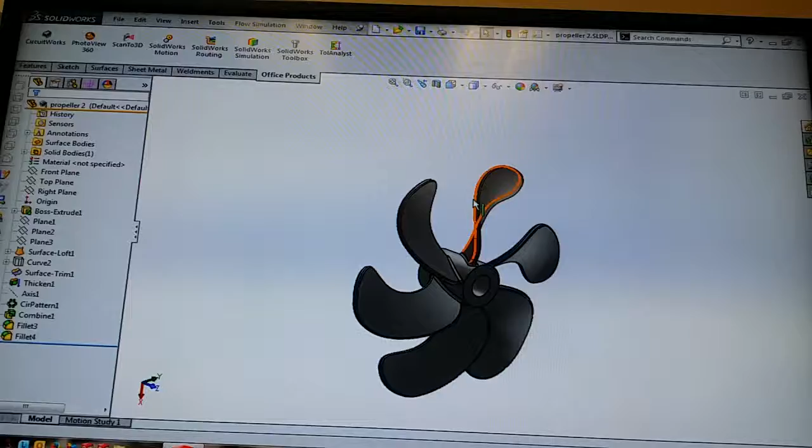Yeah, so I did that. I guess I didn't quite understand, so when I ran the simulation it didn't look right at all.

Okay, I'm just gonna mock this up. Again, the whole purpose of this is for stability. So you mock up a hollow cylinder, on the inside face of the cylinder apply an environmental pressure condition, and the whole purpose is to help stabilize it. I'll just draw something similar here.

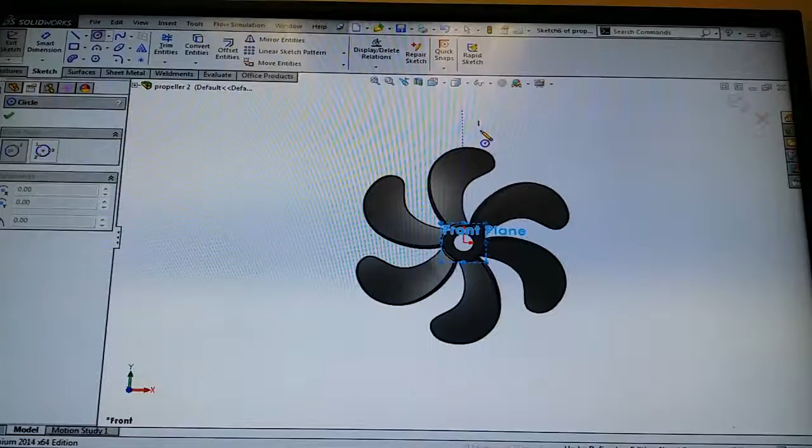So you're just doing a circle? Yeah, you're just sketching on the front plane. Okay, keep it easy there.

Work with... you got close to the boundary. Do you want to go pretty far out, or when you're setting up that circle, you don't want it too close to the object, or it'll kill the mesh.

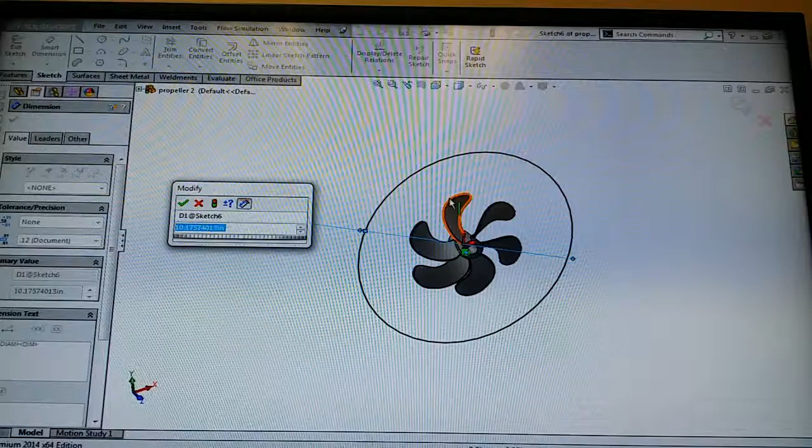You have to get the mesh cell size quite a bit smaller. You want about, I'm going off memory here, about 5-6 cells at least from the outer leading edge of the blade out to the boundary of the cylinder.

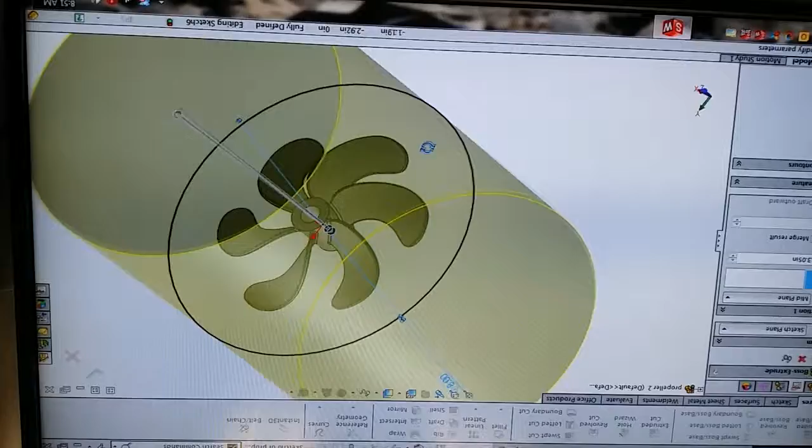Okay, so I'll probably scale this down a bit. Just look at it, that'll probably work. Okay, just want to do this, I just come this way, right? Coming in, yeah, so you really just want it.

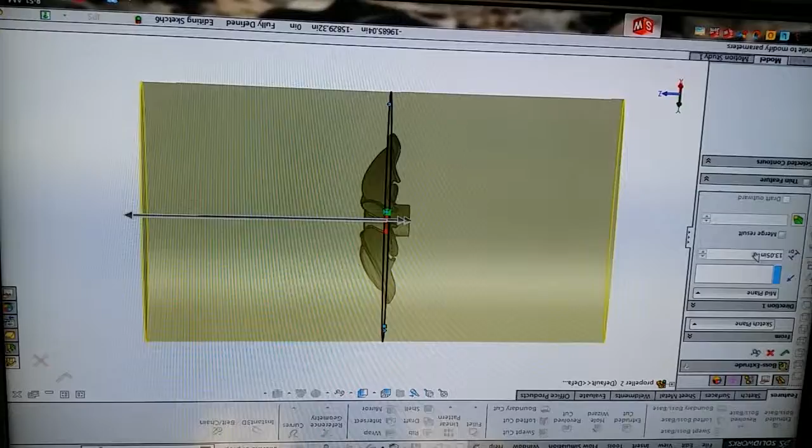Are you doing both directions? Yeah, it was at midpoint. Pretty much want it far enough distance in front of it so the flow can develop and pass, and you don't want to obstruct it. A lot of times you're kind of guesstimating size, running it, taking a look at the trajectories, and going from there. But I'm just gonna try 14 inches.

Okay, cool, that should be good right there. I'll show it.

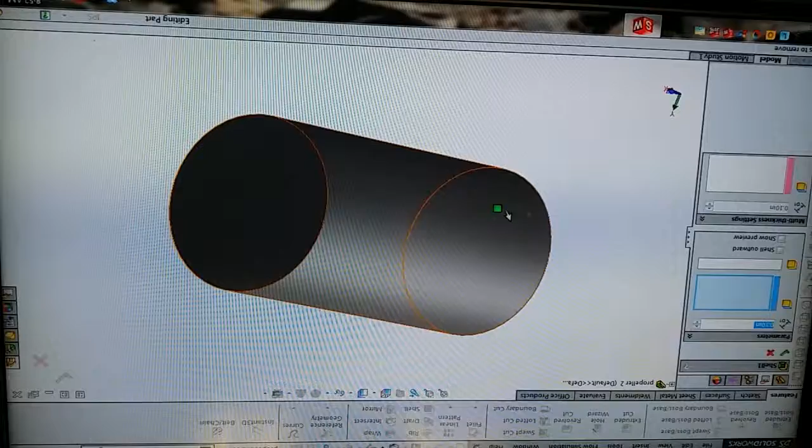Oh, you're shelling it. Yeah, so I uncheck merge result, and then I still have two separate bodies there. I want to make sure to shell the cylinder, doesn't matter if it takes too much.

Where's the shell feature? Oh okay, I'm trying to go with default, 0.10 inches is fine.

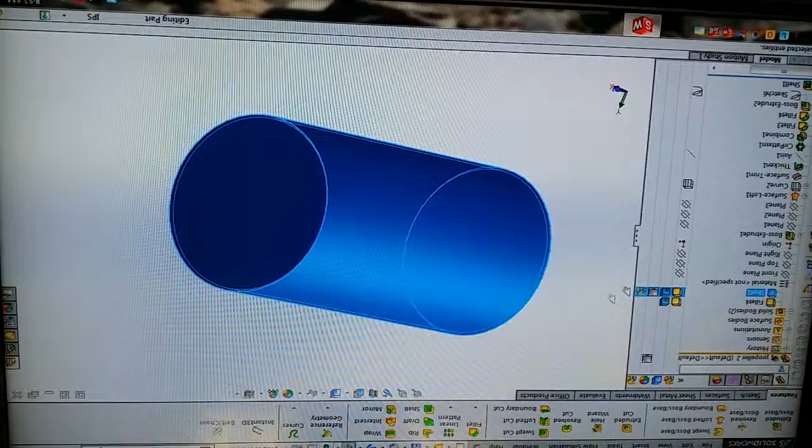Let's make this transparent. Yeah, now so I was trying to model up a tube, just a straight tube, to run a flow through, and it said the ends needed to be capped.

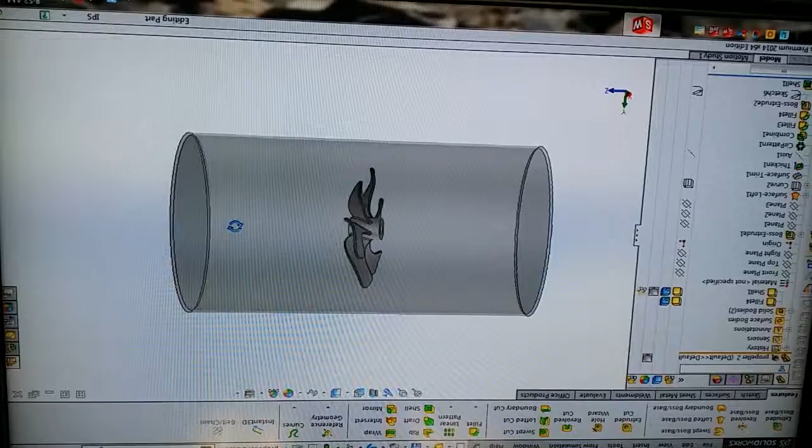How come? Well, it needs to be able to define the fluid domain, so it has to understand what is the volume of the flow. Oh I see, okay. In this case with the shell, it doesn't have to be separate bodies, so I can just pick the inside face of the shell for my boundary condition surfaces.

So how did you just do that? To the section, you just kind of show it. Oh okay, and it made the body transparent just to be able to see through it.

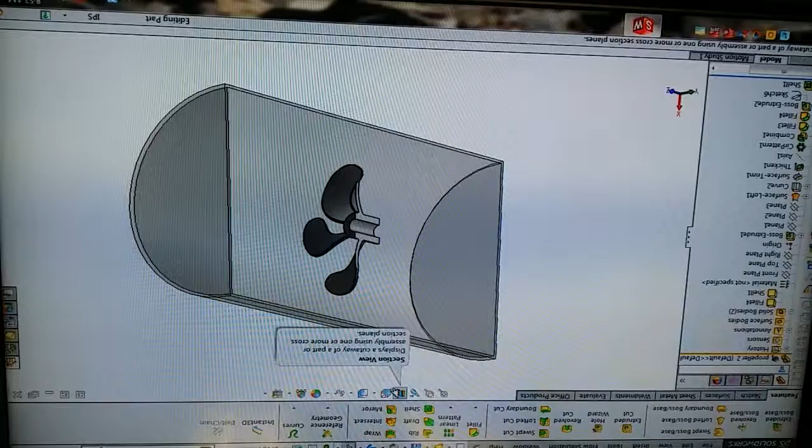You just picked the right plane for that? Yeah, doesn't really matter, either right or not. Actually top or right doesn't really matter, just a section cutting through it to show.

So my propeller disappeared. You have merge result on, most likely. Where's that? Go and edit your Boss-Extrude2. Edit feature? Yep, yeah, uncheck the box merge result.

Okay cool, and then you'll be able to- that was two bodies. I thought I shelled it, oh do I need to? Now it failed because there's multiple bodies.

Then it's okay, that's the next one. There we go, okay cool.

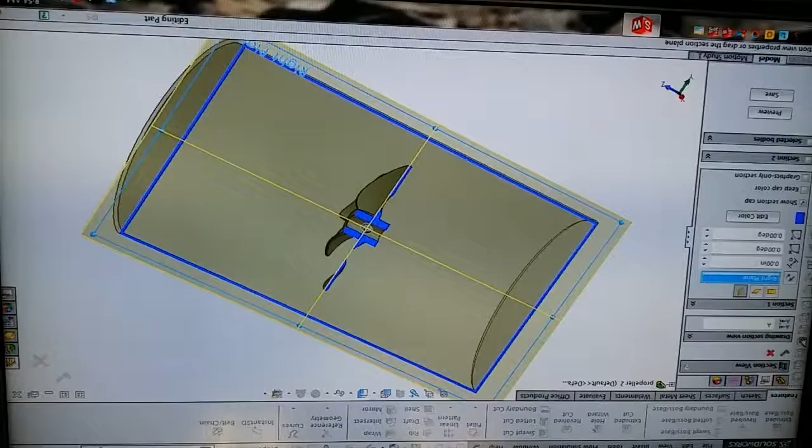And if you want to make it transparent, I'm not sure if you guys play around with the display pane at all, in the vicinity here. Yeah, with multiple bodies you can adjust the color, transparency settings, stuff like that, for just the outer body, so you can see through it.

Are you guys all SolidWorks users? You guys play with this? Pretty much, yeah, so the feature. Yeah, you guys been using the S key shortcut, setting the letter S? It pops a little toolbar. It's been out since 2010 or something like that. That's pretty cool.

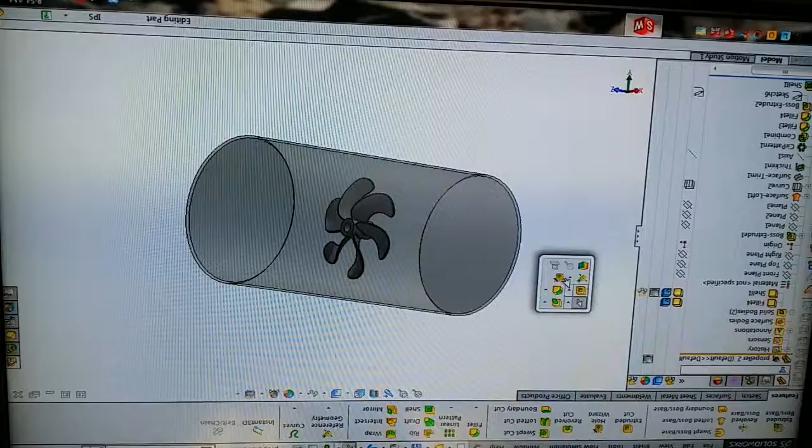Yeah, you can right click anywhere on the bar to customize, whatever you want there, put anything you want so you can throw features onto your sketch. The toolbar doesn't matter, so it's not mode specific.

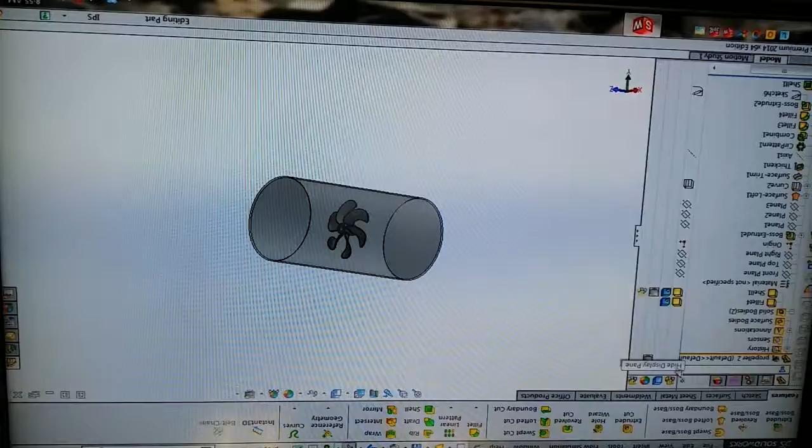Let's step to the wizard. In terms of creating a project, you use the wizard or hit new, and it'll be based off a template. There's only one template in there, but you can create your own. I'll just step to the wizard here - yeah, this is what I did.

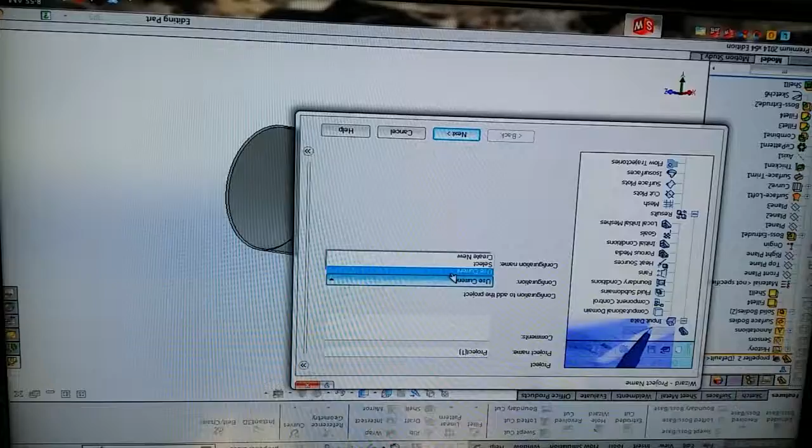For the wizard, depending on how you want to set things up, you can tell the system to use the current Solidworks configuration and create a new one, or use the selected configuration. I'm going to go with current here. For the project, I'll just leave it as the default name.

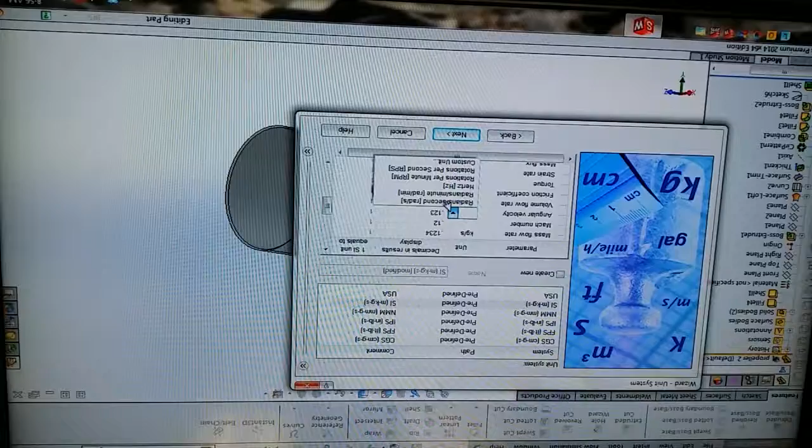In terms of rotational velocity, radians per second is the default there, but you can change it depending on what you're working with - RPMs, hertz. We'll probably do RPMs because you guys are calculating the propeller velocity in RPMs, right? Okay.

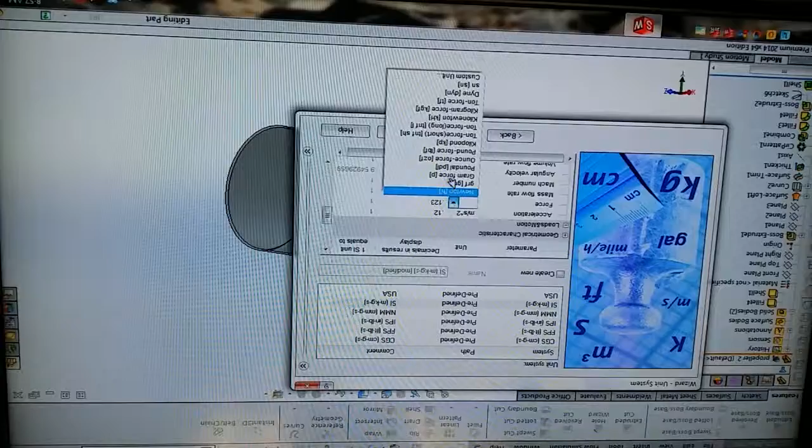Alright, cool. In terms of analysis type, in this case this would be internal since I created that cylinder, so we're just analyzing the flow inside the cylinder. If you have flow over the object or through the object, you'd go external, which gives you the ability to be in both domains.

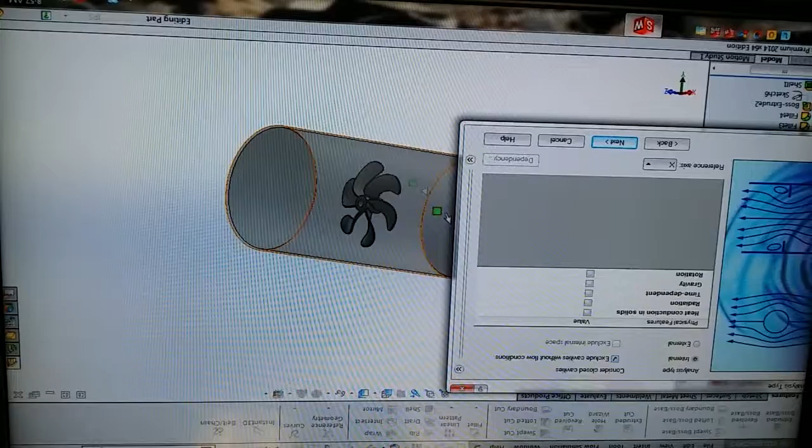In this case it's a real simple setup, not much to it. Exclude cavities without flow conditions - won't come into play, doesn't matter if it's on or off since there's only one cavity. The blade's not hollow, there's nothing in it, no internal domain, so it's just one entity and it doesn't matter if it's on or off.

If we were worried about actually taking a look at the blade heating up, we'd turn on heat conduction if needed.

In terms of actually running the calculation, there's time dependency or there's steady state. There's really no steady state solution for anything like this - it's just based on the stability of the flow, kind of oscillates. So we try to run it as time dependent, say run for a minute, 2 minutes, and kind of see what happens.

Or what you can do is set the end condition, say let's run it for 2,000 iterations or 1,000 iterations, and let it develop and stop yourself, take a look at what's working with the hard result. I'm just going to leave it off at the moment.

Gravity - again, it's going to be in water, so I don't know how gravity would apply. I wouldn't really think it would apply here, but you always worry about that.

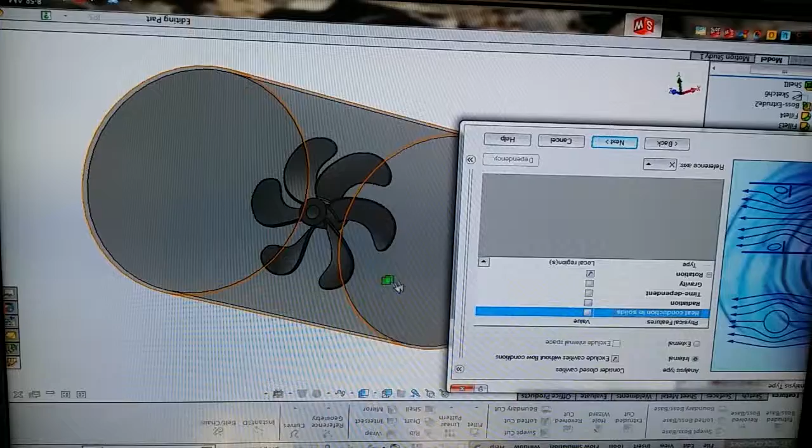In terms of the rotational region, the local region would be if I had to mock up a body of revolution around the entity, and say that's rotating at a certain RPM, which I'd pick afterwards. There's an option here for global rotating, which gives the ability to specify the entire domain is rotating - meaning the flow comes in and the entire entity is rotating.

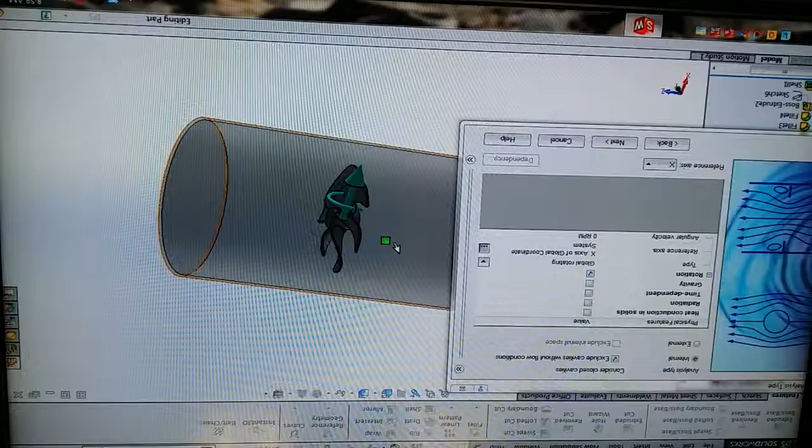I think the best bet on this one - let's play with this - should actually just go ahead and create a body of revolution around it first. Knock it up offhand.

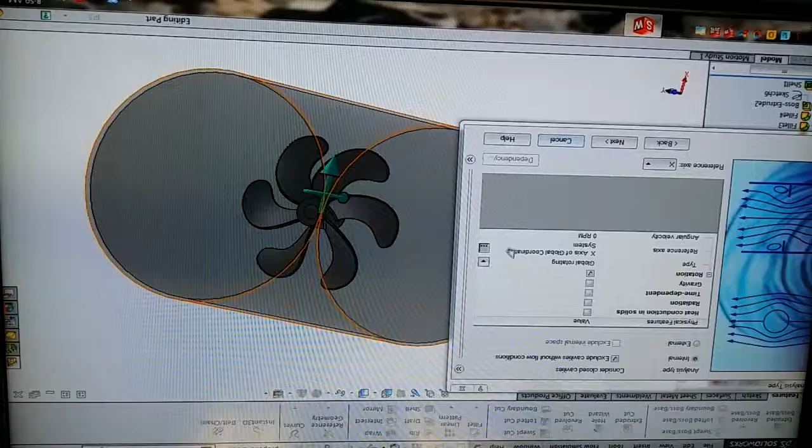I think it would be appropriate - we're saying the entire domain's rotating here, going through it. So we'd have to adjust that though, right? Yeah, I just kind of forgot. If we want to leave it as global, that would say the entire domain - we're talking about the entire internal volume here rotating, and that's probably not going to be appropriate. Just forgot all about that.

But if we were to do it, we'd have to change the axis of rotation - I think it's simply the Z axis, following the Z here. So yeah, let's do that - it would make sense in this case.